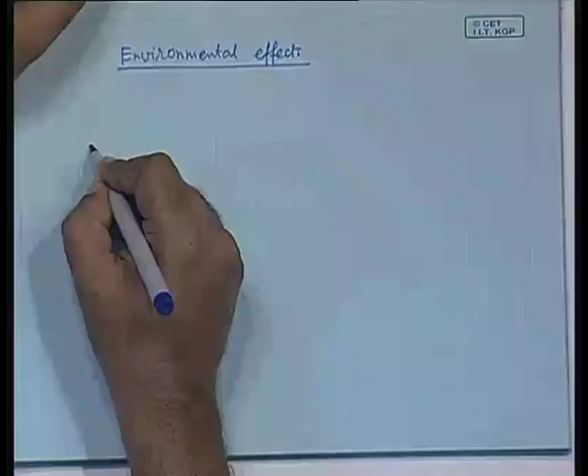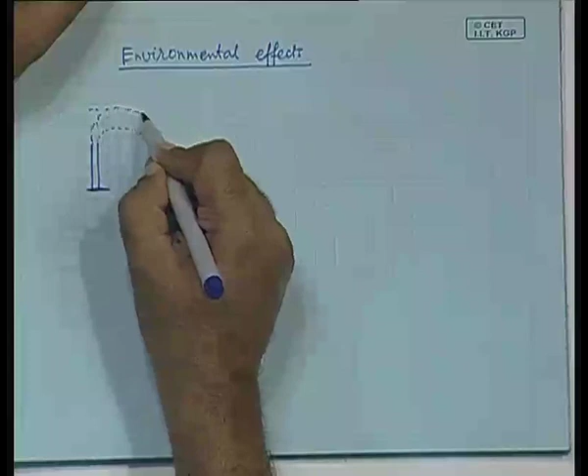In this case you have some height of the chimney, and above that it rises to some other height. So you assume it rises to this height, or it actually goes like this. This is the stack, and if you join these lines, it reaches a point somewhere here. So you can assume that the flue gas rose to this height and then was dispersed. Even though these lines are not really straight, it is not unreasonable to assume that.

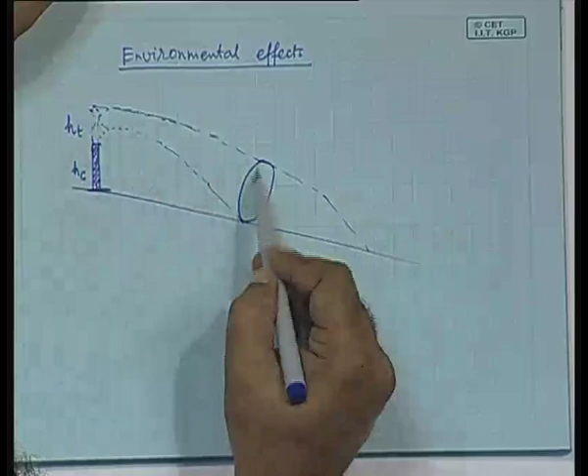Suppose this height is HC, the height of the column, and let this height be HT, meaning the height to which the plume rises. Suppose this is the ground; it touches the ground at some level, and at this point you can assume a circular cross section, expanding as it goes.

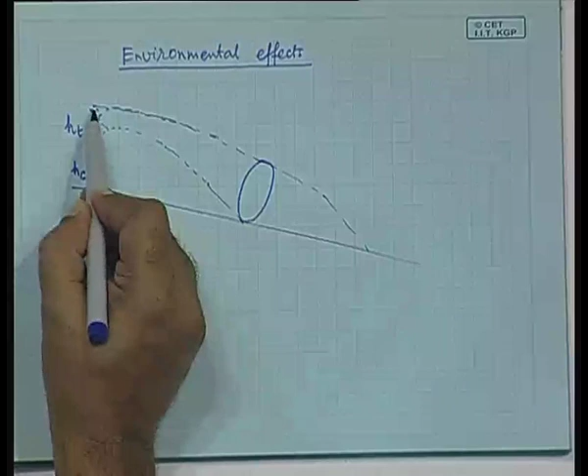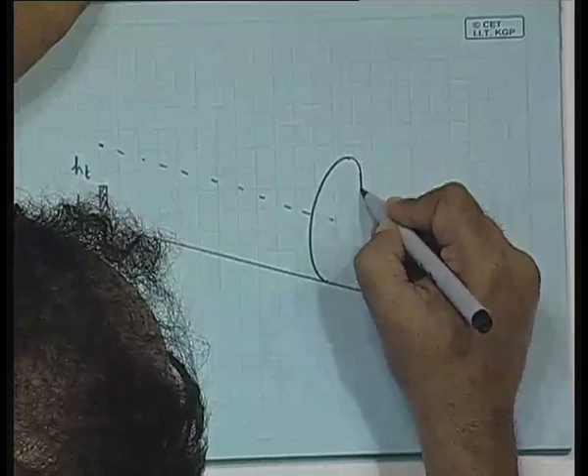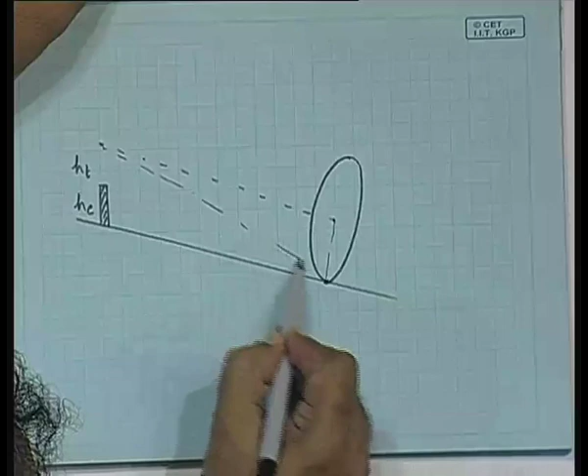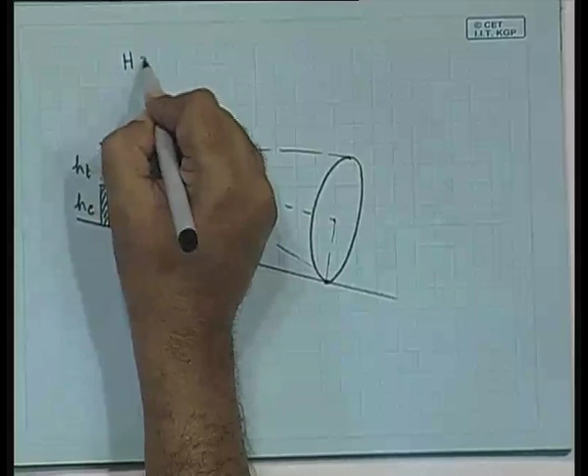Let me draw it separately so it's correct. Suppose this is the ground line, this is the height of the chimney, and this is the height to which it rises—so this is HC and this is HT. At some distance it touches the ground, and at that level you can draw a circular cross section of a certain radius. It is actually going like this, but you extend those lines, so that the total height h is HT plus HC, and this radius is also h.

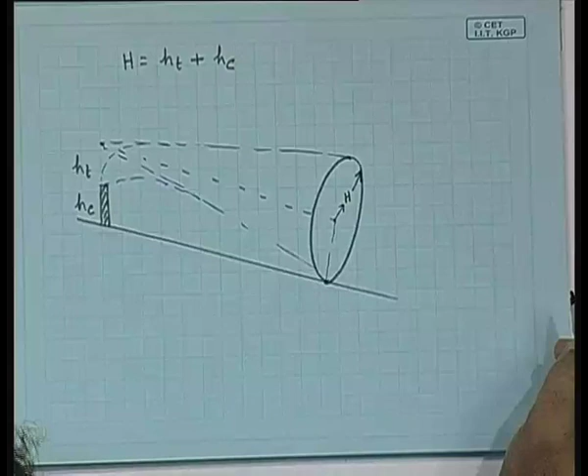Now the question is, after how much distance will it touch the ground? In general, it has been found that this is of the order of 15h. So things are expressed in terms of h.

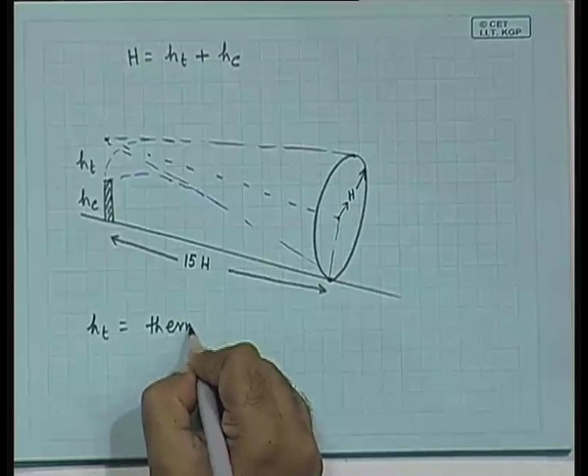You might ask how much should HT be, because if everything is calculated based on the total height, you need to know how much it will rise. That obviously depends on the energy content in the flue gas and so on. So let us see what they are: HT is the thermal plume rise, and HC is the stack height.

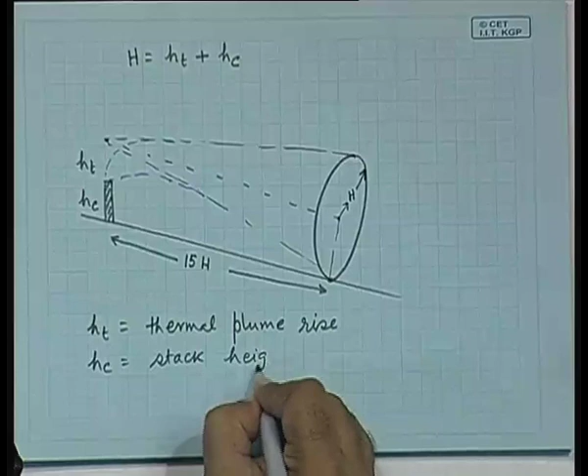These issues that we will be dealing with are very important. You may have noticed that at Calcutta there is a Kolaghat thermal power plant. It has 3 stacks that are shorter, and then in the newer stage a far taller stack. Why? Because it was found that the shorter stacks were causing problems, so they built longer stacks. These calculations we are doing now are important because you need to bring down the level of pollution below a certain level, and that really depends on the choice of the height.

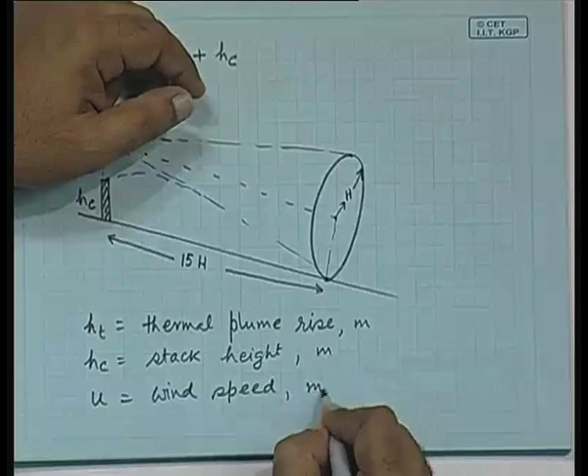So let u be the wind speed. These are all in meters, and this is in meters per second.

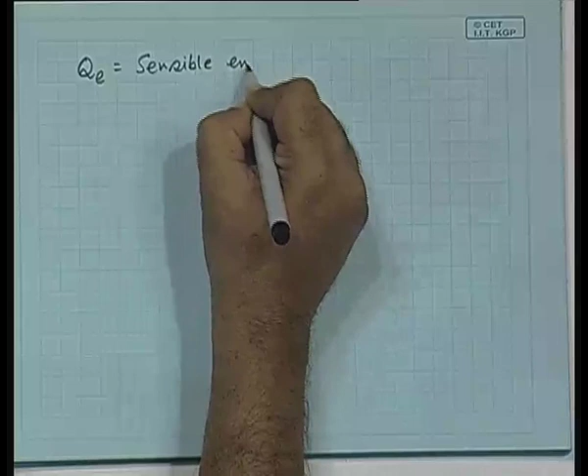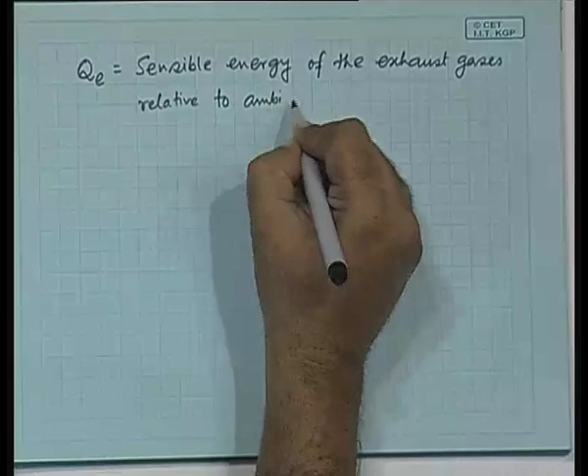Let Qe be the sensible energy, relative to the ambient temperature. Do you have any idea how much it is?

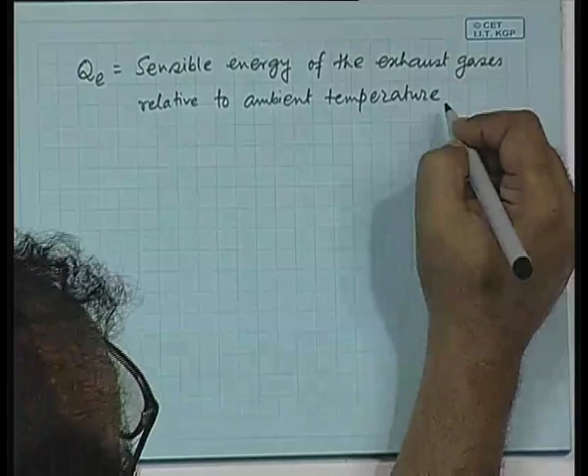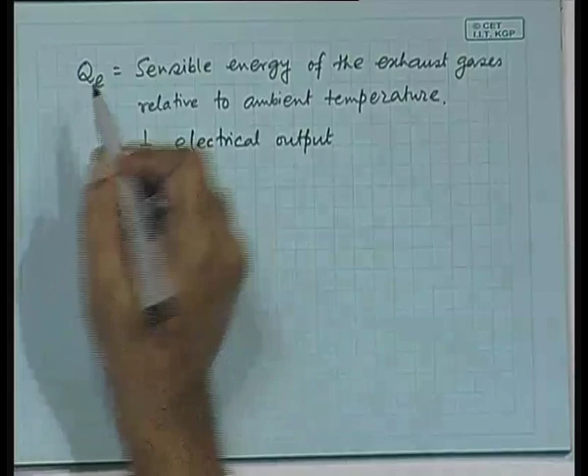Is the energy content in the flue gas? How much? In general, a rough estimate is about 1/8 of the electrical power output of the power station. So this is approximately 1/8 of the electrical output.

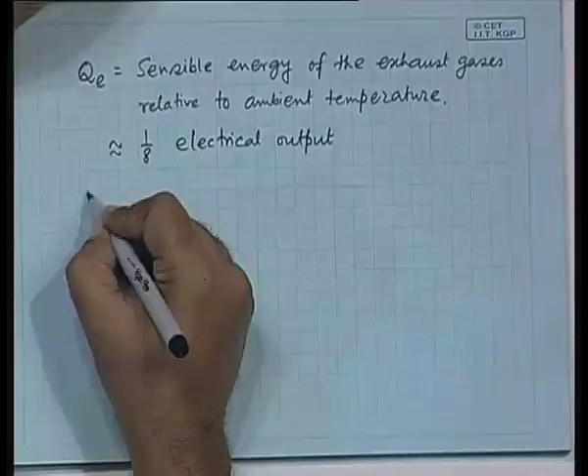Qs is expressed in kg per second. What is this? Suppose you are talking about SOx pollution, then how much SOx is there in the flue gas in terms of kg per second - that you need to know in order to calculate.

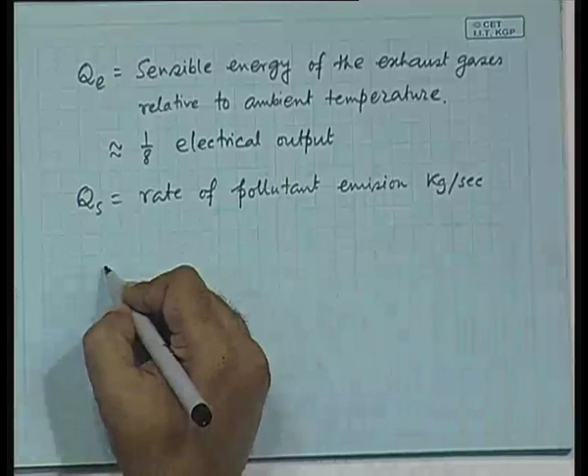Then the most important thing is to know HT, how much it rises. It cannot really be calculated because it has to be obtained from empirical figures. People have observed and seen that it follows a certain relation. Normally this figure is something like this.

It should depend on the energy content to the power 1/4 divided by u. Obviously it should depend on the stack height, it should depend on the energy content, and it should also depend on the wind speed - inversely proportional to it. The more the wind speed, the less the height, and so on.

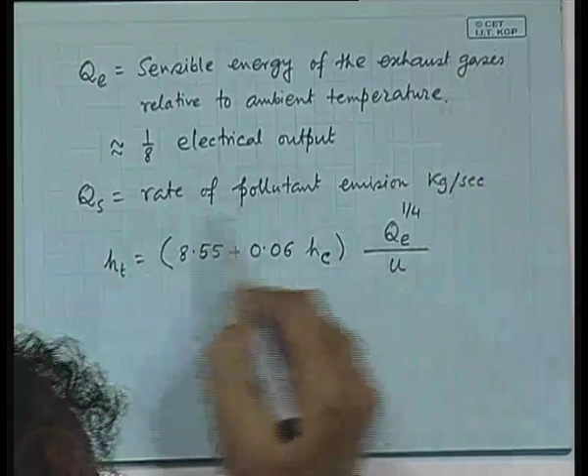So the dependence is more or less intuitively clear, but the exact functional form obtained from empirical studies is something like this, and capital H is equal to HT plus HC.

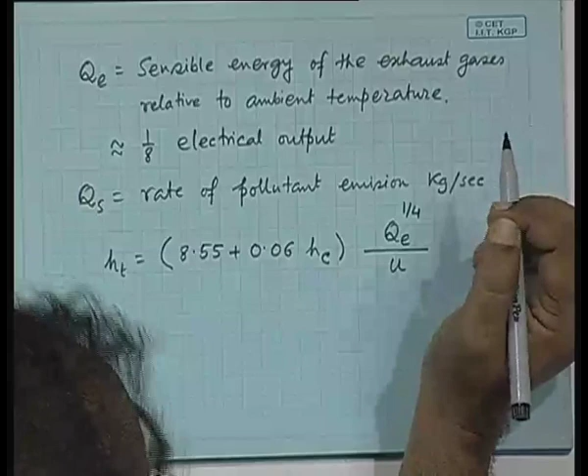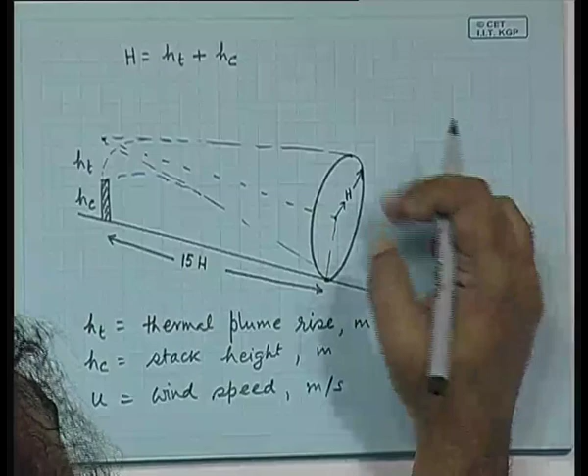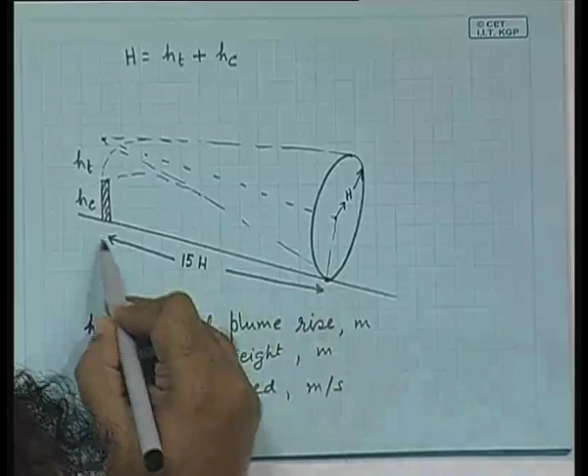Now let us look at this. The plume rises to this height and then expands like a cone, finally reaching this particular point. So when it reaches this point, what is the volume flow? We are interested in when it touches the ground - that means it has come to this level - and now we want the volume flow rate of the pollutant. So how much should that be?

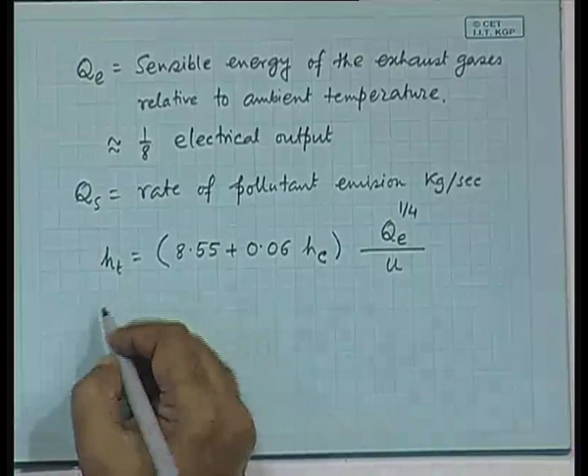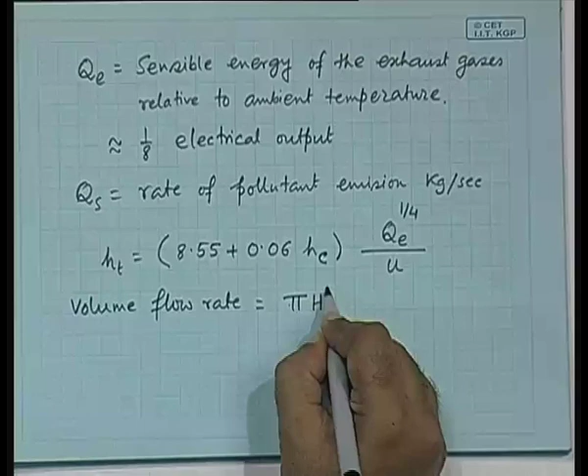It depends on the area, it depends on this flow rate u. So volume flow rate would be pi H squared u.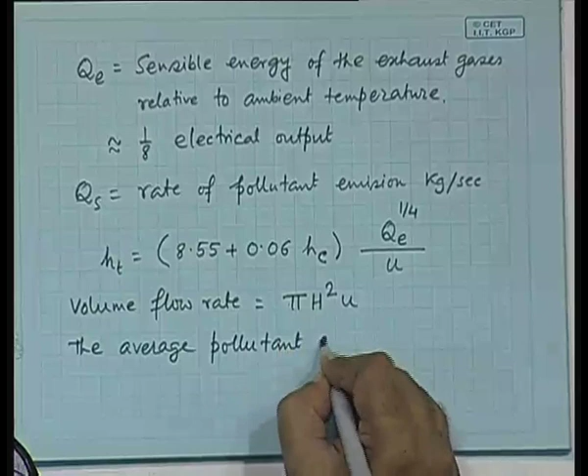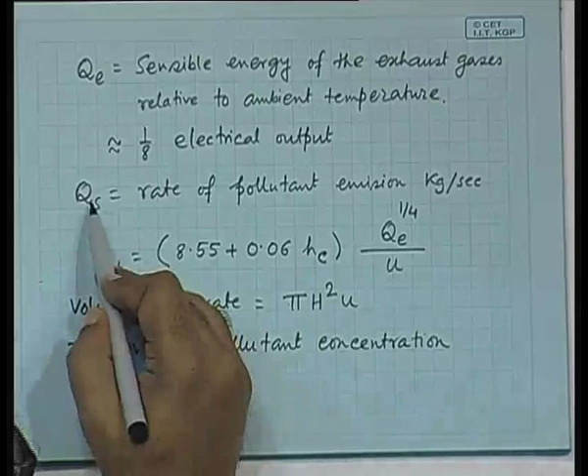Now, the average pollutant concentration in the plume in this particular plane would be C0, expressed in terms of the rate of pollutant emission - this amount of pollutant emitted divided by the total flow rate. So you have QS divided by pi H squared u.

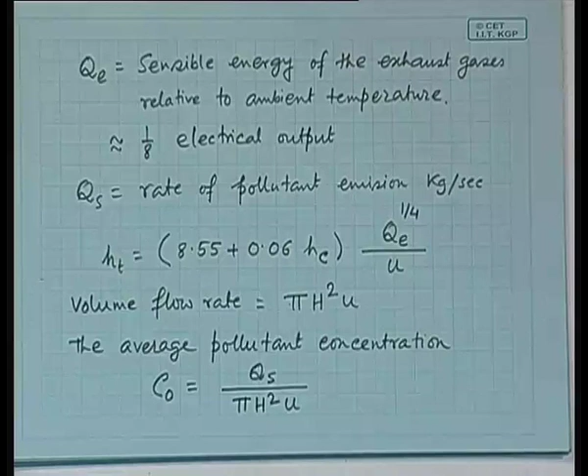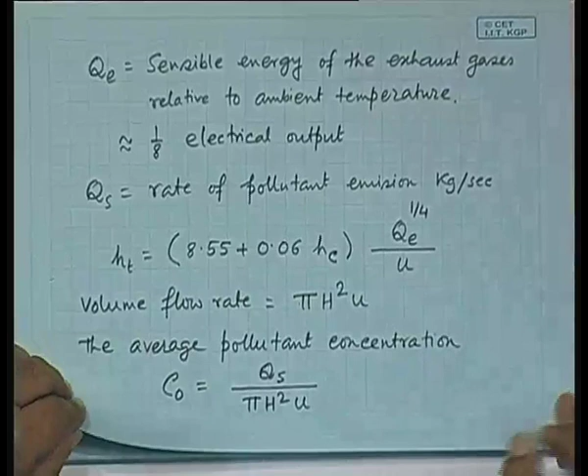So that is a simple affair. You have this expression for the average pollutant concentration. So what are the units? QS is in kg per second.

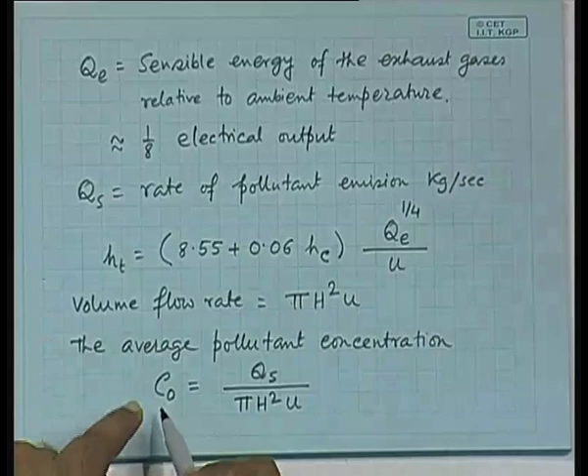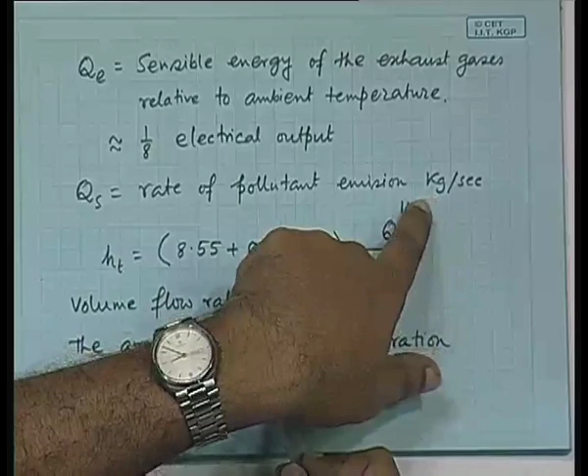So this needs to be expressed in microgram per meter cube - that is the unit in which pollution is expressed - and this fellow was available in kg per second. Why? Because you knew how much sulfur is there in the coal, so much coal was used in kgs, a fraction of that so much kgs, and the rate at which the coal is consumed can be expressed in this term. So this is available in this term, and this needs to be expressed in that term.

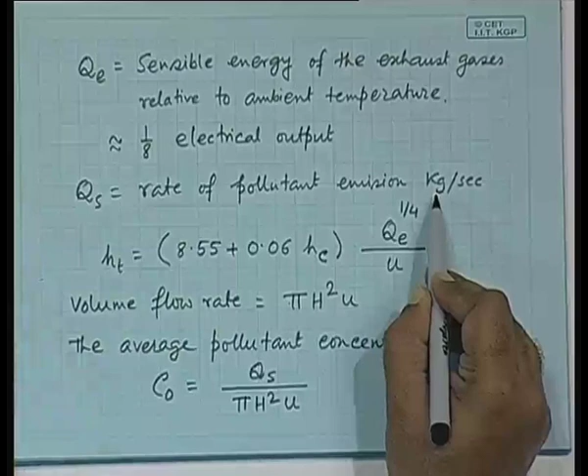Can you check whether it will automatically convert into this term? Check the units - this is available in kg per second. So this should be microgram times 10 to the power how much, and so you just calculate that.

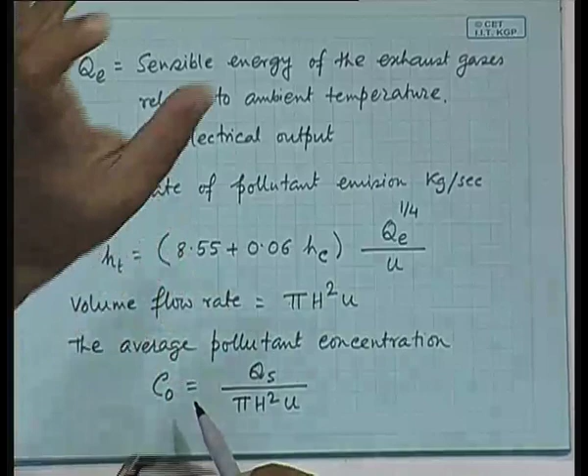The other way to express concentration is ppm, parts per million. Since SO2, SO3, SOx are gases, we ask how much of it is present in a large quantity of air - that's another way of expressing it. This also needs to be available in terms of volume. Remember these units when working with this equation, because if you say there are so many kgs of pollutant in a place, that doesn't make sense. It's either microgram per meter cube or ppm.

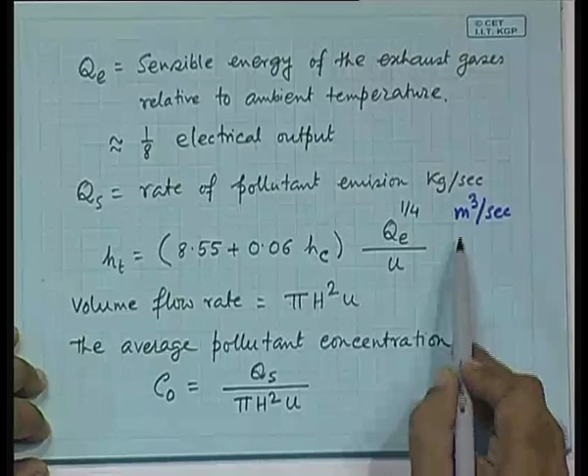If QS is expressed, it can be in meter cube per second, since it's after all a gas, it can be expressed in meter cube. If it's in meter cube per second, it will be expressed in ppm. If it's in kg per second, it will be available in micrograms per meter cube. So we have understood at least this part.

Now this is the instantaneous concentration - this much was being emitted, and out of that this much reaches there, but that is instantaneous. The wind is flowing in this direction, this person is standing there sniffing the maximum amount. But over the year, what happens? Wind direction changes, so a particular radius around the power plant gets affected at that distance 15H. So if I ask you to calculate what will be the average level of concentration over the year, assuming more or less uniform directional changes in the wind, can you calculate it?

It's a radius in which things are reaching, and I want you to calculate the average of that. You have to assume random wind direction - if it's directional, it will be skewed in one particular direction, but assume randomness. Then how will it be? If this is the height and this is the thing, you will be talking about a cylindrical area in which it sort of spreads.

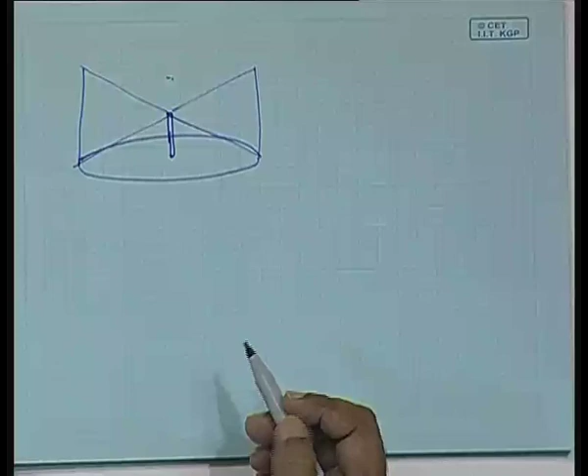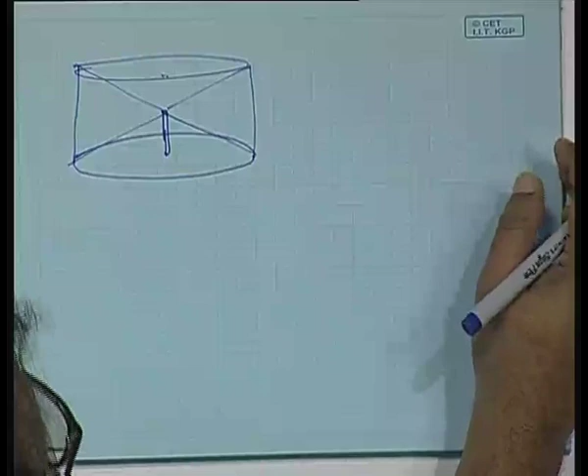It will be spreading over this kind of cylindrical area, and we are now interested in how much is the concentration there over the year. How will you calculate that? That will be Qs divided by the area of the cylinder - that is twice pi, this radius is 15H, into this height, which is twice H, times U.

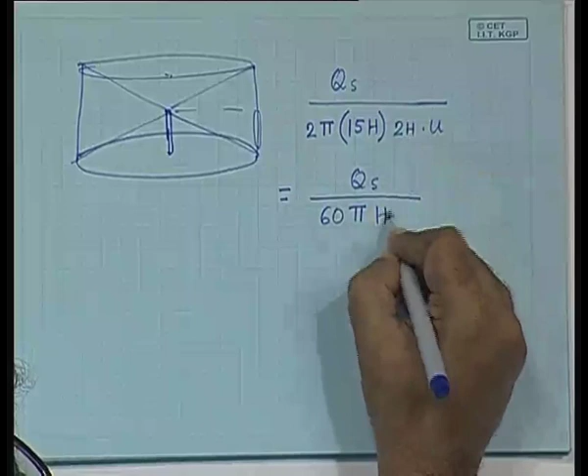Notice here this height is H, the whole thing is twice H, so you need to use twice H in this case. So this is equal to Qs divided by 60 pi H square U. Again, depending on which units Qs is expressed in, you will either have it in ppm or in microgram per meter cube.

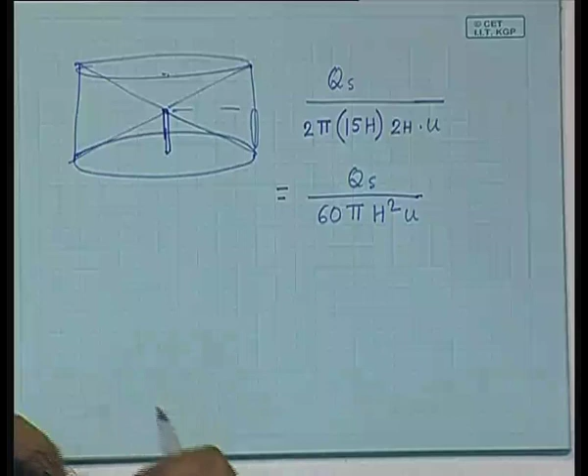Let us tackle a simple problem, a practical situation. Suppose there is a 2000 megawatt power station, a very standard size of the super thermal power stations that NTPC is installing these days. The one in Farakka is about 2000 megawatt, the one in Korba is 2000 megawatt, and so on and so forth. Suppose it burns coal with, you just assume this, 2% sulfur.

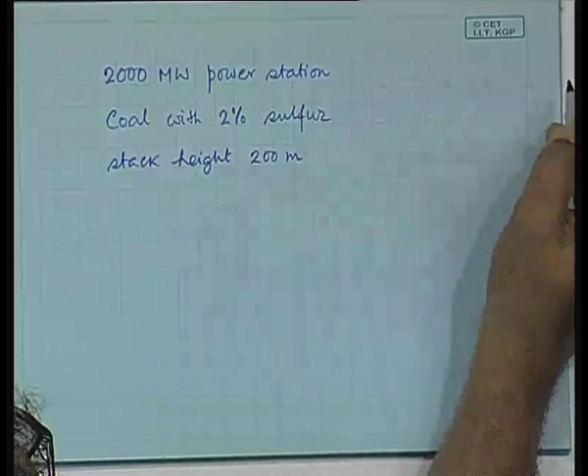That can be known - Indian coal has relatively less, but nevertheless you assume this in order to learn how to calculate. Let the stack height be 200 meters. Let the wind speed be about 7 meters per second. All these are very standard values.

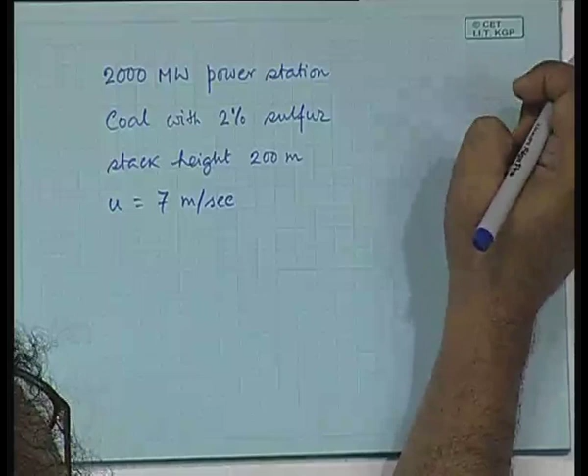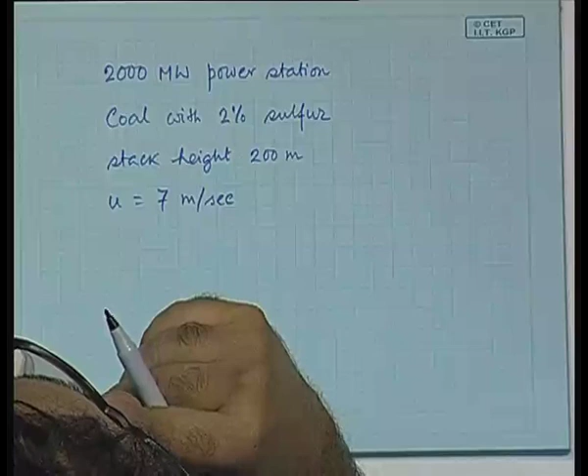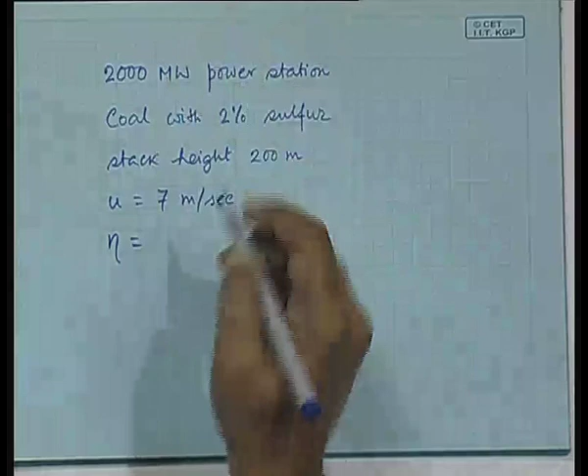Is this the average speed throughout the year? No, presently we are trying to calculate it now - at this present moment this is the speed at which the wind is blowing. If you are to do it over the year, this speed has to be the yearly average wind speed at that particular location. So what other information would you need? The efficiency of the power plant - that can be assumed with a reasonably good figure, about 38%.

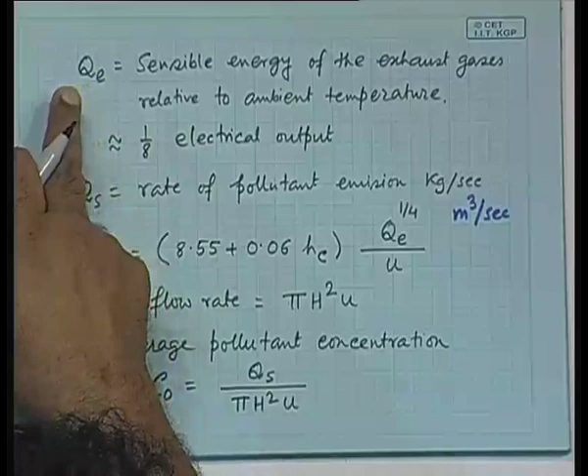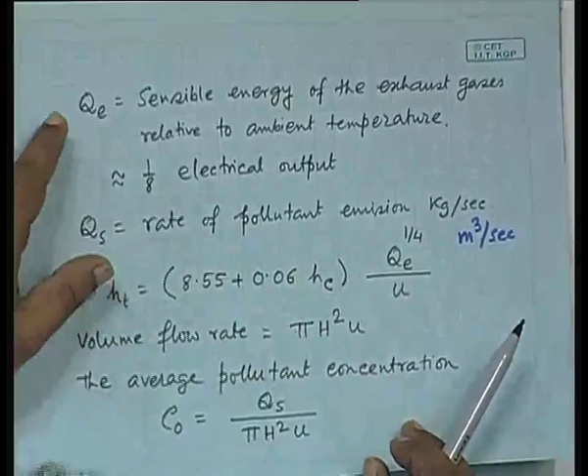You need to know this sensible energy, right? Yes. So in order to calculate this, 1 by 8 is a very rough quantity, as I said - you can always calculate that better. This needs to be calculated, and for that you need the heating value of the coal, which is 25 into 10 to the power 6 kilojoule per ton.

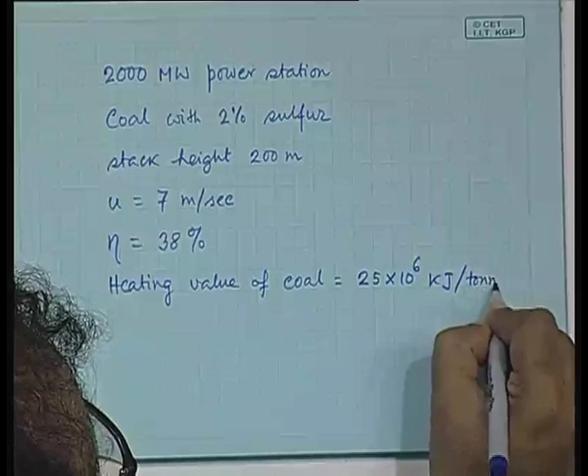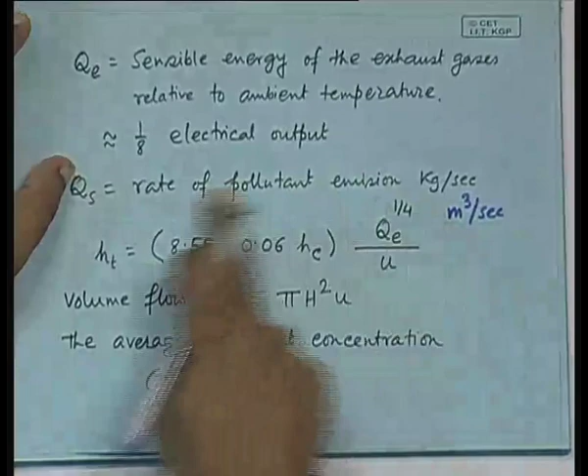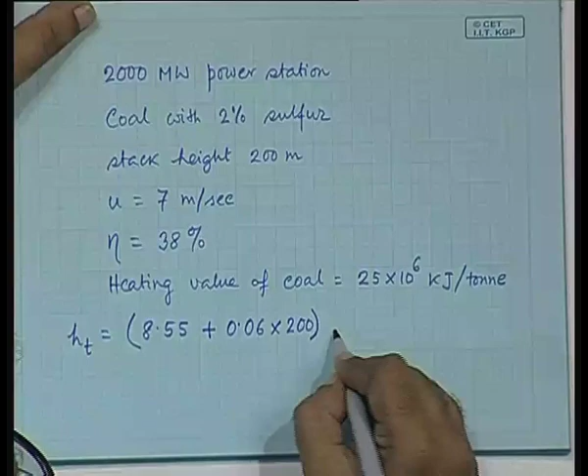Okay, the first thing is to calculate this - let us calculate HT. You need to calculate how much the plume will rise. That is 8.55 plus 0.06 times 200, times QE to the power 1/4 by U.

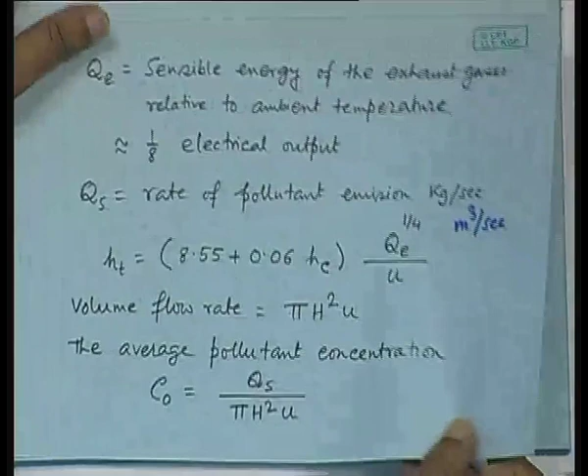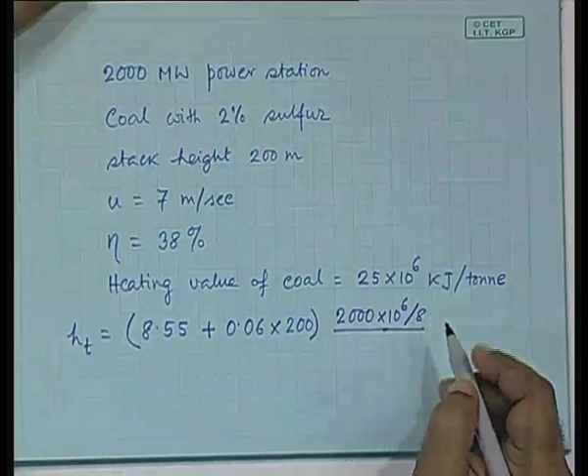QE can be calculated from there. You have total 2000 megawatts - this is the power generation capability, and approximately therefore the heat content in the flue gas would be 1/8 of that. This has to be to the power 1/4, divided by U, and U is 7.

Can you calculate what this is? Do you have a calculator? None of you have it. Yeah, do calculate - when I calculated sometime back, it came to be around 369 meters.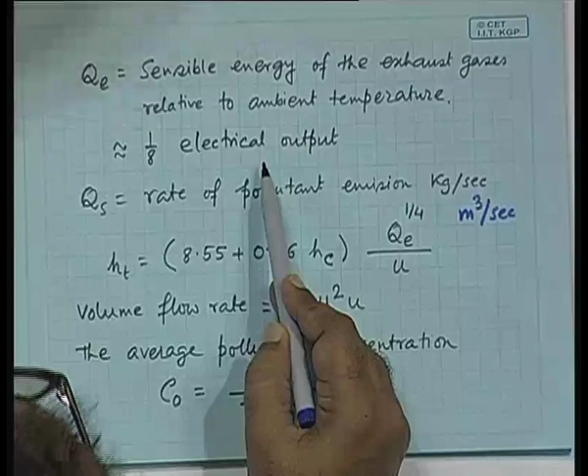No, no, no, efficiency at this stage will not come in, because the sensible energy of the exhaust gas, that is what we are interested in, is about 1/8 of electrical output. That's what you're using. Electrical output is 2000 megawatt, and that's enough for our purpose now. So we are using this relationship. We will use the 38% later somewhere else - for this, the approximate value suffices.

So the initial stack height is 200, it additionally rises to this much, so the total height is 569 - h is 569 meters. Now you need to calculate QS.

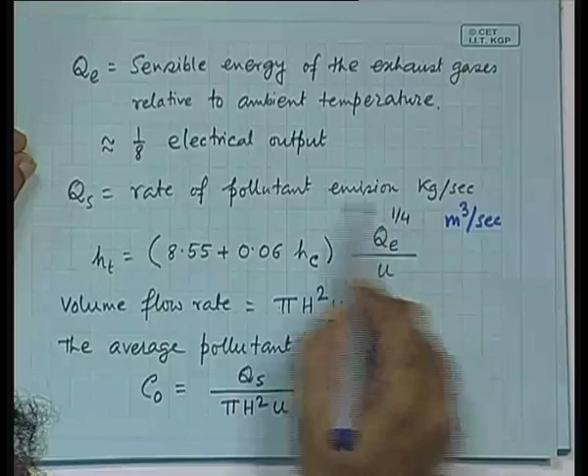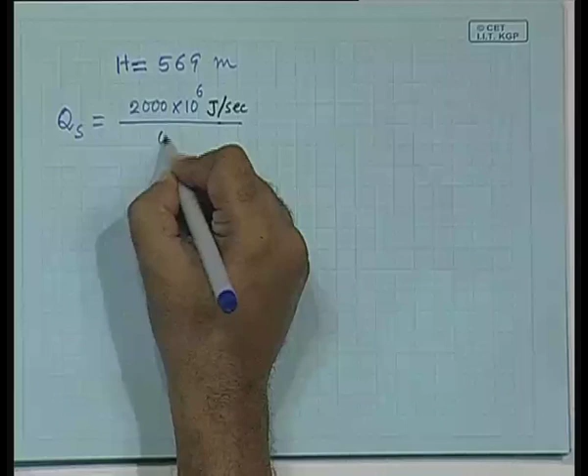First, the total electrical power output is 2000 megawatts, divided by the efficiency, you get the total heat generated. In order to produce that much heat, how much coal has to be consumed, and within that coal, how much sulfur is there - that's the calculation. You need the efficiency: 2000 into 10 to the power 6, joules per second, divided by 0.38, non-dimensional. This gives you how much heat is generated.

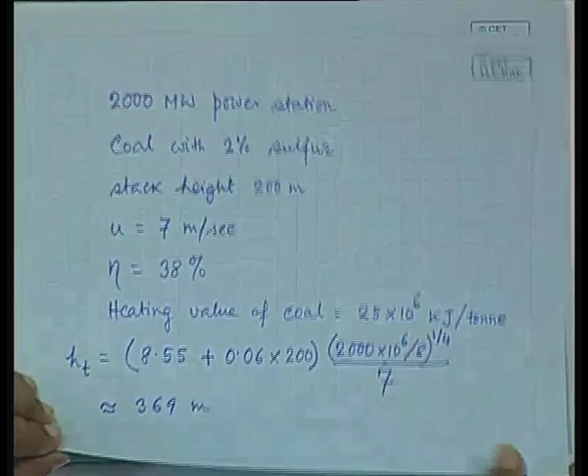Then it has to be multiplied by kg coal divided by the heating value. Heating value is 25 into 10 to the power 6. Now you have joules here. It was kilojoule per ton, which comes to joule per kg - you just multiply by 10 to the power 3, divide by 10 to the power 3, it comes to the same.

Now you need to use how much sulfur is there. How much sulfur is there? 2%, so it should be 0.02, this is kg per second, divided by the kg coal. Then this is the amount of sulfur that is generated per second.

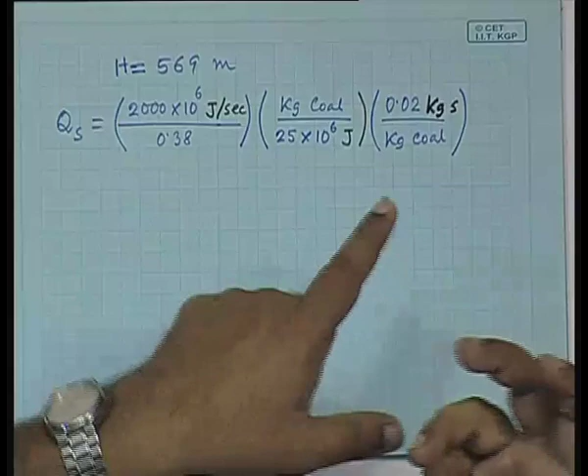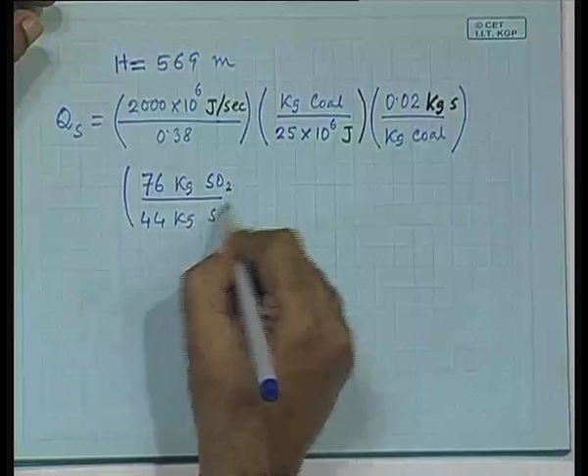But sulfur is not what you are interested in, you are interested in SO2. So how much sulfur generates how much SO2? You know that chemistry - approximately 76 kg of SO2 by 44 kg of sulfur... no wait, S is 32, and... it has to be like that, 2 is somewhere, it is about 2. So if you calculate this, you get the value - probably it will come to approximately 7.

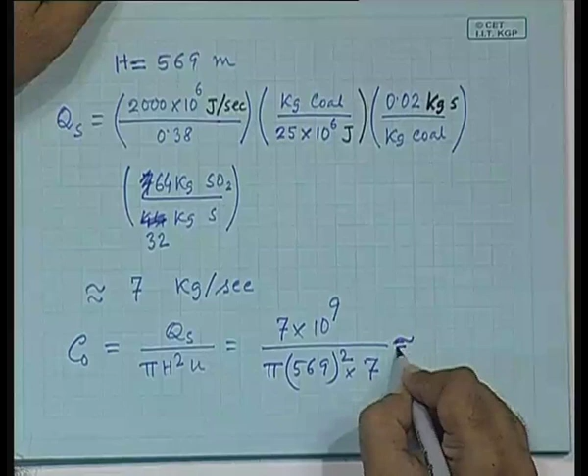Calculate it once - so if it is approximately 7 kg per second, then the next step is to calculate this: C0 is QS divided by pi H square u. This is again 7, and we are talking about micrograms, so it will have to be multiplied by... divided by... pi H is 569 square into 7 meters per second. So how much does it come to be? Approximately you can say 1000.

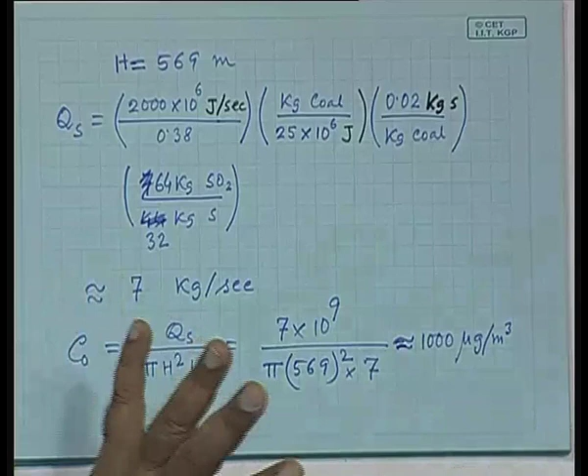So this is how the calculation is really done. Do you understand that if the pollutant substance is something else - say NOx, say suspended particulate matter, or in case of any other industry some other thing is coming out of the flue gas - then you can do the calculation the same way. Because engineers need to talk in terms of numbers and amounts, you should be able to calculate the amount of pollution that reaches the ground at a certain level. But as I told you, this is spot pollution, the pollution that reaches a spot.

But what about the pollution that reaches globally? The amount of carbon dioxide that is generated and released globally is a major problem because of the greenhouse effect, which you are feeling, right. Now we are in the middle of a greenhouse phenomenon, the weather is changing. Every year Cherrapunji and Mawsynram used to receive huge amounts of rainfall - this year it is desert. Every year Rajasthan is a desert - this year it is a flood. You can see the effects we are facing, and all these are because of the increased release of carbon dioxide, methane and other greenhouse gases into the atmosphere.

So coal based power generation is not all that benign a source - we need to understand that. It is true that the amount of carbon dioxide generated can be at least partially reversed if we plant as many trees, because trees absorb carbon dioxide and release oxygen, so it has the opposite effect. But the rate at which this is done - what has actually happened?

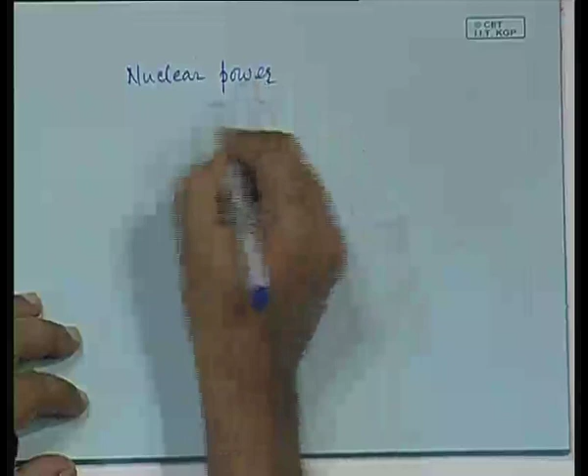In case of the nuclear power plant, what are the environmental effects? There are a few things we need to keep in mind. In nuclear power, there are a few stages. Remember, the thing that you are handling is radioactive. But at the same time, it is true that radioactivity was there in nature. In that place, it was there. But now you are concentrating it, it is becoming much more radioactive, much more dangerous.

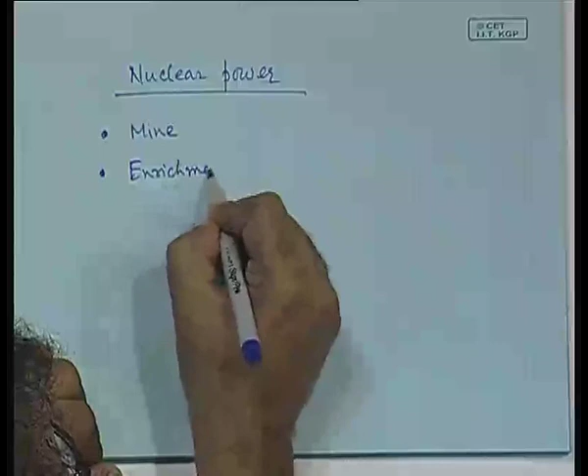So it starts, number one, from the mine. Then the enrichment stage. Then the power plant. Then you have to talk about the nuclear waste.

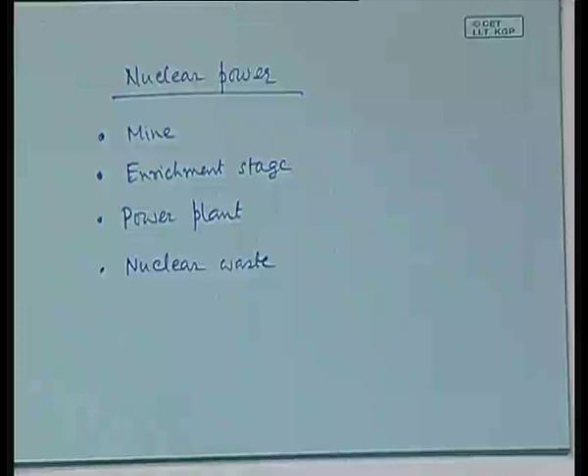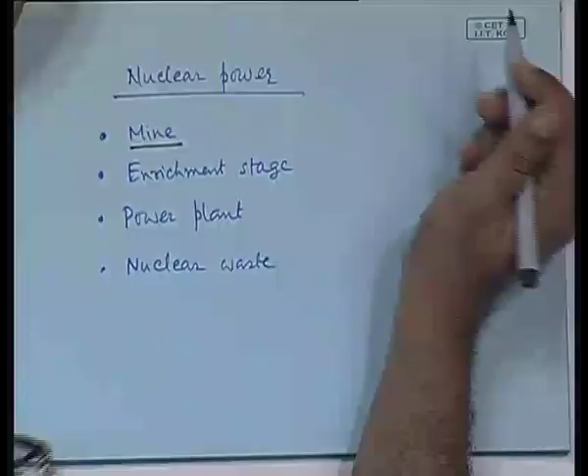In the mine, for example, in Jharkhand there is a mine in Jadugoda. Unless proper precautions are taken, the miners or the people who handle that ore - mostly tribals who do not know the nature of this ore - are affected very severely. In the Jadugoda mine, a whole area has been affected, with a very high increase in disabled children being born, people with all sorts of congenital deformities. So mine is one area in which there can be pollution unless the people who handle it are careful enough, and in India the problem is that people can get away without being careful, and therefore they are not careful.

The enrichment stage happens in some specific plants. So the ore has to be transported to that place, and since it is a huge amount, mainly clay material, that transportation happens without much precaution. That is another problem - proper precaution has to be taken to contain that thing to the enrichment site. Enrichment means you enrich it in the form of uranium-238, uranium-235, and the rest is thrown away. Now the rest of the things also contain radioactivity, so its disposal is a problem.

Okay, come to the power plant stage. Many people point out that in modern power plants, the chances of accidents are very low. As we have seen when talking about different types of nuclear power plants, the one with a boiling water reactor is somewhat environmentally problematic, because the same water that goes to the core of the nuclear power plant also goes to the turbine, to the condenser and stuff like that. So the whole place becomes radioactive, and that is obviously not environmentally so benign.

But then there are other designs - pressurized water reactor, heavy water reactor, gas cooled reactors - where the coolant is something else. The coolant is not the same as the fluid that actually boils. What boils is water, but the coolant is something else. As a result, the radioactivity is contained within the area very close to the core. In India most of the reactors are of that type, so things are relatively better shaped than in places where most are boiling water reactors.